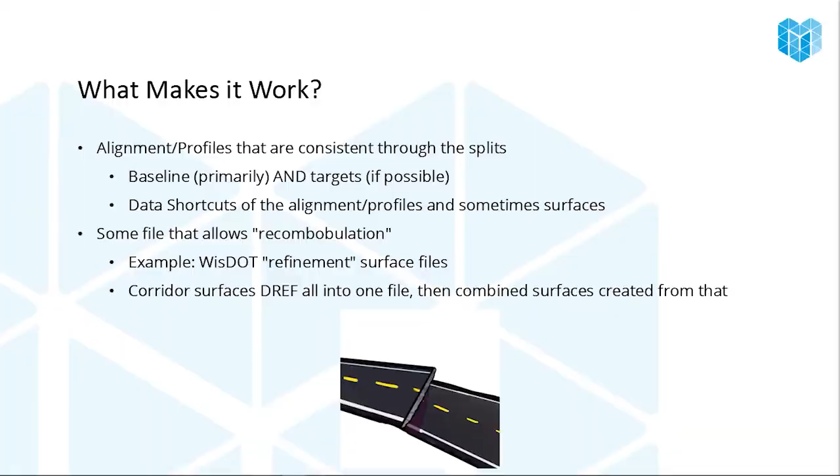So with those things in mind, where do we best split a project? I tend to say generally here, but really what we're going to do is find where the project has the minimal amount of change. Now, if you've got intersections in a project, those are the most complex areas, or generally the most complex areas in a project. You might have other complex areas too. You want to avoid complex areas or places where there's a lot of change, because things don't always line up great in an area of lots of change. You want an area that's more consistent—a very boring part of the road in between two intersections is a great place to do that.

Also, I would avoid any areas that have grading, because grading is usually not consistent. It's coming off at what could be different angles and could be not as prime for the kind of split that we need. Like I said, we want to divide this in a clean area. Now, I have seen projects where grading was a predominant part of the design, and it would be very difficult to split anywhere else—find the best place in the grading if you have to do it there. Try to make it perpendicular; try to find a place that would be perpendicular and a little bit more consistent for the two areas to be matched up.

I'm also going to recommend that you avoid sample line stations—not because it's an actual problem, but if you're going to have any trouble at all with this, it will be where the two points join. You don't want that to be at a sample line station, where it's going to report weird information onto your cross sections.

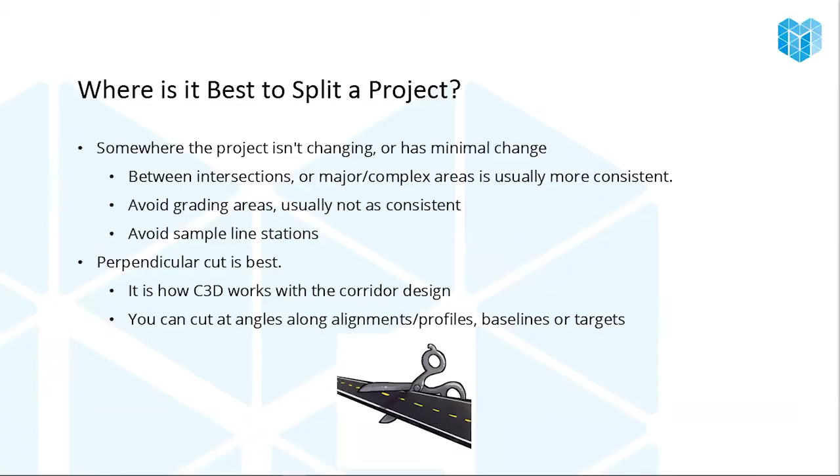So the last thing I want to talk about here before we get into a demonstration is confirming that the splitting and rejoining is working. I am going to touch on the rejoin process here. Really what we're going to do is confirm it. Whether you use this combined surface as a deliverable or as part of your deliverable or not, you may want to create that side file so you can create the combined surface and paste it together just to double check things, even if it's not going anywhere else. So create a file where you can create a combined surface and paste those two surfaces or multiple surfaces together. I have two in my presentation here.

And turn the contours on, because nothing shows abnormality like a contour. If there is any deviation at all in horizontal or in vertical in profile targeting, contours are going to show that immediately. And I think you may even be surprised. I'm always surprised when the contours are so smooth in an area where I know there's a seam. So it's something that you can check very easily.

You can also use profile views to do this, and it might be a good idea if you have a lot of elevation design going on. Create a profile view of the surface and the area that you're doing the work in and check. I think this is a little harder to tell because the differences could be slight where the contours would show, but in the profile view it might be so small that you wouldn't necessarily see it. I'm talking inches rather than feet. But if it is off by feet, you would see an escarpment and know that there's a problem there. Basically, where the corridor surfaces or project surfaces are stitched together, there's no seam visible to anyone showing how you put them together.

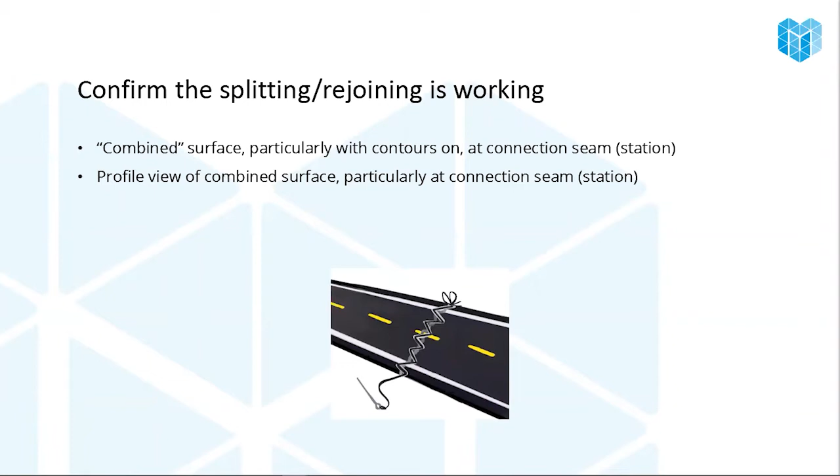Now, do you even need to rejoin the surfaces? I'm going to recommend on some level, yes, but maybe not for your deliverables. If you're working on a project where cross-section sheets are your deliverable and you're not going to split your project at a sample line location, then maybe the cross-section sheets are enough. And as long as those are good, it doesn't matter if you're off by a couple of inches up, down, or sideways at the join point. Also, plan and profile sheets can sometimes get away with a little bit being off at a seam point, but you couldn't be off by much.

But if your deliverables are things that are fine not knowing if the rejoin worked, then maybe you skip that. I'm going to recommend it again, just as a back end check to make sure things are correct. One of the things I've noticed about Civil 3D specifically is that we can no longer just explode and draft over something to make it right. We really do need to concentrate on making the project correct and almost digitally developing something like we will in the field.

Not in every nook and cranny perhaps, but generally if you want something right, you need to go in and do a little extra work to make sure that it is clean and correct, and exploding and drafting over is just not going to do that.

So now let's swing over and take a look at our presentation, or the demonstration, I should say. I do want to point out that I'm using Civil 3D 2022. However, everything that I'm doing in this file will work in previous versions. In fact, I don't think there's anything that I'm going to show here that you couldn't do in 2016, 2018, 2021, all the different versions here.

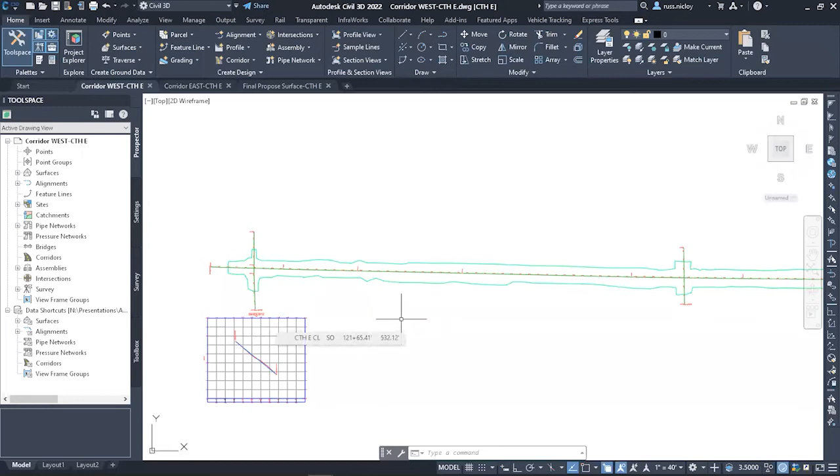So what I've got is a project between two intersections. And as I said, it is a fairly short project. I might even try to accomplish this in one file and not split it. I do have the surface existing conditions, all the alignments and all the existing profiles in their own files, and they are data shortcutted into the file. So I've already practiced what I'm preaching here of splitting the file up that way.

I do want to call something out real quick, and this is something I did learn from WisDOT, but I think works for everybody. The existing ground profile is here. It is data referenced in from my alignment profile file, but this profile here is actually in this file. I'm designing it here where my intersection is. My plan is I'm going to use the intersection tool here, and that will mean that that proposed alignment will react to the intersection tool. But to have that reaction, you need to have it in the file.

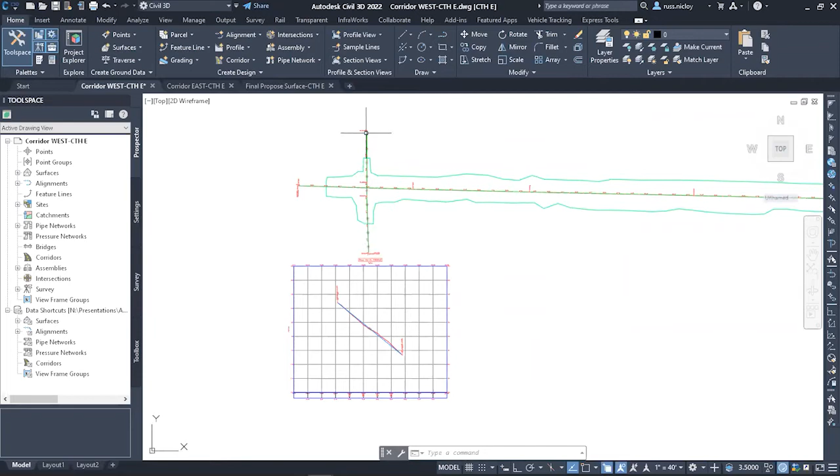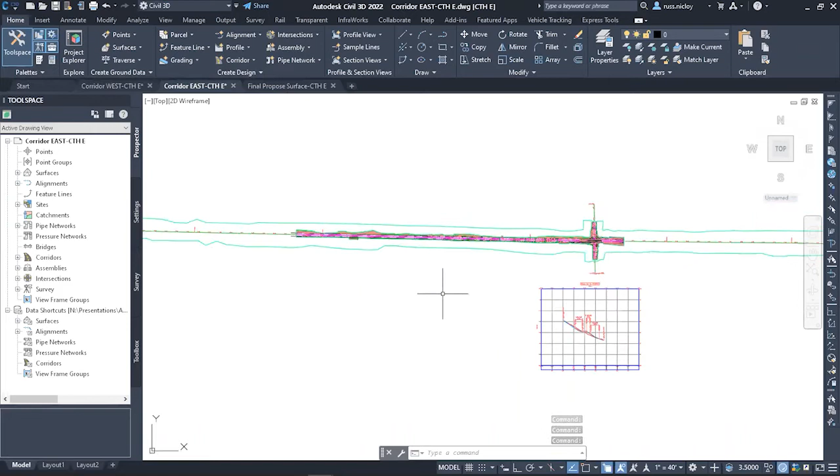So I do my profile design work on my side roads in the file with the corridor, the intersection. The mainline profile here is in my alignment profile file and is data shortcutted in here, as well as in my east version. You can see here, I've already started creating my corridor. I have started the east side of this. Through discussions, we've discussed that the project should split here.

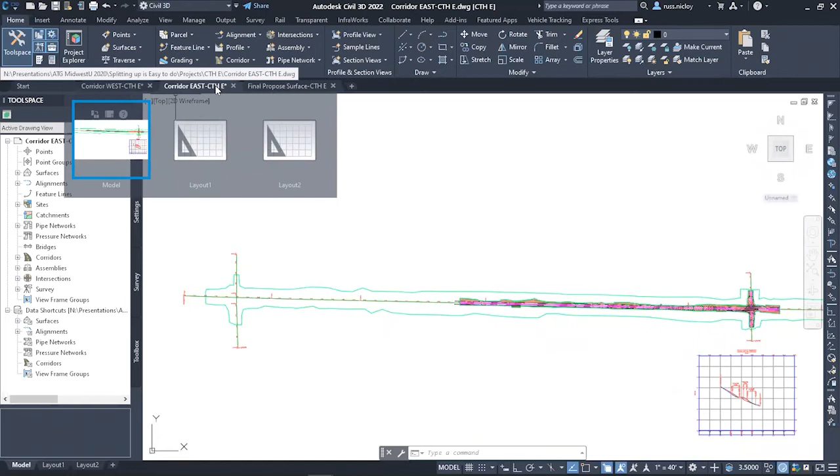Let me zoom in so you can see where that is. It's at station 126+00. Like I said, probably where a sample line will end up. I should have split it at 126.13 perhaps. But that is where this project is going to stop. So the east side of County Highway E has the corridor and intersection up to that point, up to 126. I'm going to go back to the west side here and develop the intersection and the design up to that station and stop exactly at station 126.

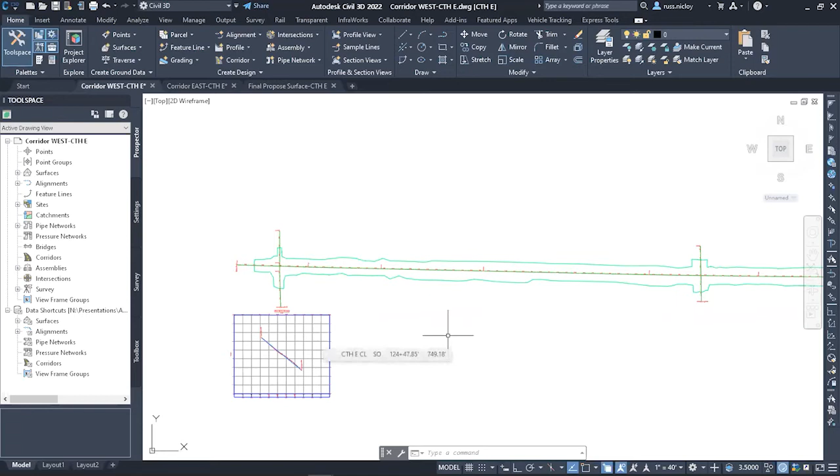Stopping at a very granular, very precise station is, I'm going to say, mission critical to what we're doing today. You might be able to get away with it, but I've never tried to get away with it. So I'm going to come up and choose the intersection tool. I'll create intersection here. I'll do this quickly, but I wanted to show the process. This is my County Highway E and River Road intersection, just so that I know what that intersection is when I find it later.

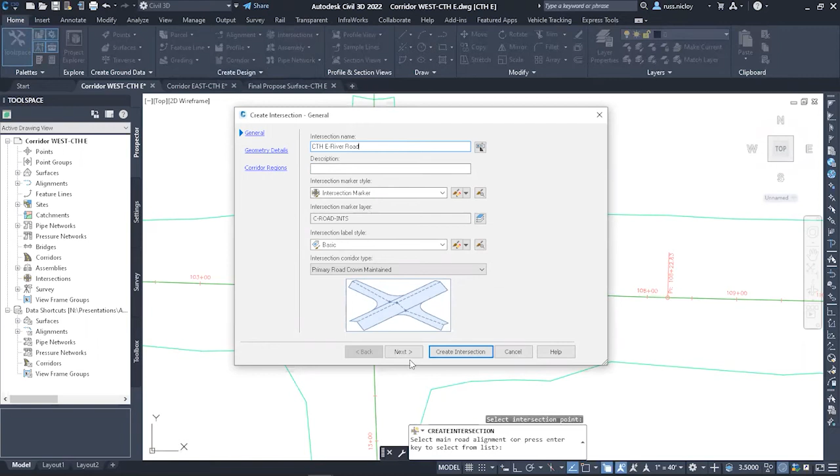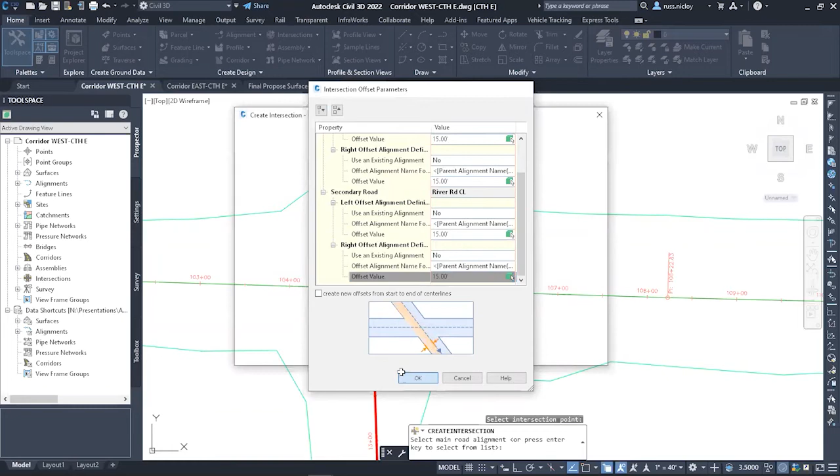I'll go next, and in here, I just want to make sure that the profiles are both there because we are building a three-dimensional corridor here with the intersection tool. I'll go to the offset parameters, and my defaults are not set to the width of my project, so I am going to set those. These are all 15-foot roadways here. The curb return parameters, I'm not going to change. I just want to touch on it: part of what makes this so complicated is the turn lanes, whether you're expanding the lanes and that type of thing. So I'm going to say okay and just accept the defaults for today.

I am also going to look at the lane slopes. Those all look good. And I'm going to confirm the curb return is giving me 25 extra feet on the profiles so that the corridor, when it's built, doesn't miss any stations by a very, very short amount. 25 feet is plenty to cover our design there.

When I go to the next tab here, it gives me the opportunity to create a corridor. Now notice there are no corridors in my west file. The corridor I showed earlier is in the east file, so it's not in here. They are completely separate, completely new. You can add this intersection to an already existing corridor if you wanted to, but I'm doing a fresh corridor in this file using my existing ground as my target, and these are the assemblies I'm using.

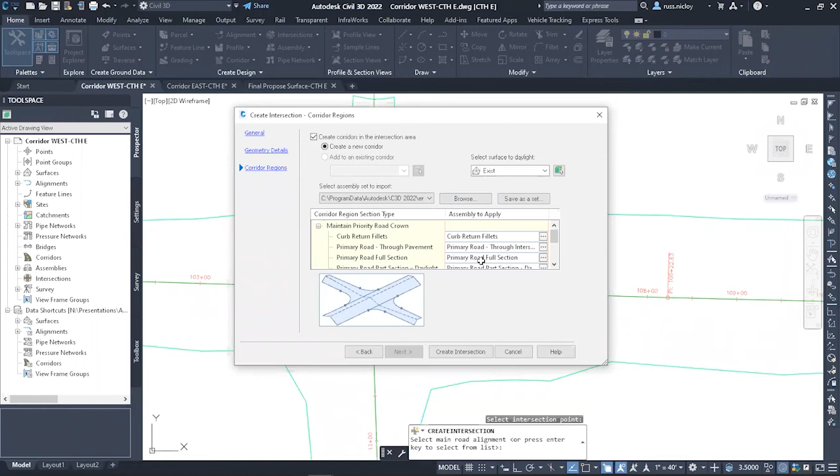I'm basically using the default assemblies to build this corridor. I'll say create intersection, and that will kind of grind away for a little bit. And there is that corridor. Now, the corridor is actually more than meets the eye here.

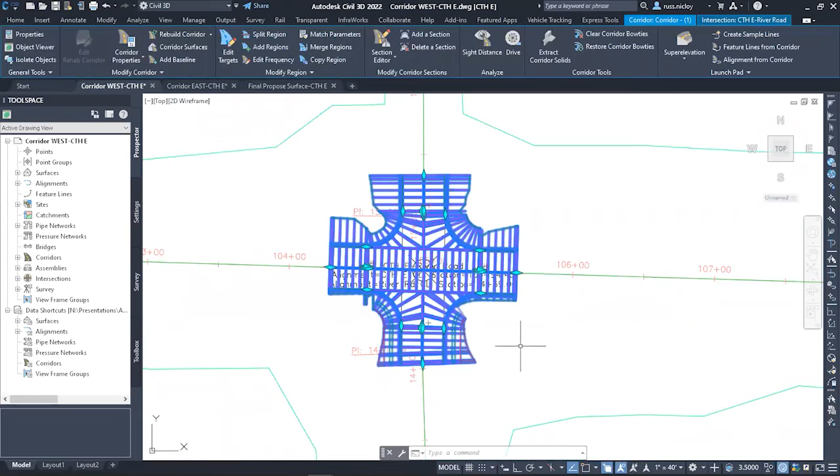If I come down here and select on this, one of the best practices I think that should be shared with everyone is when you're building anything that has intersections, build the intersection or the more complicated design first. And then the rest of the design is easy. In fact, I'm just going to drag my corridor out here away from my intersection, so that I can see that the design that I ended up with at the end of my intersection is just going to continue on.

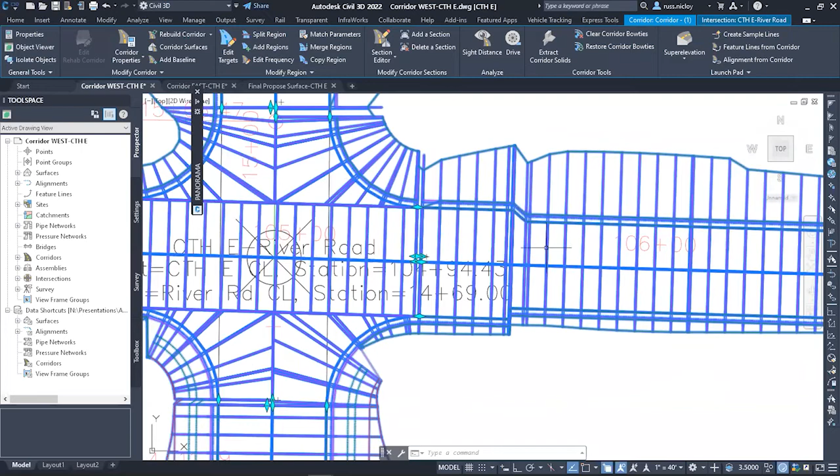The downside is because I told the lanes to be 15 feet, they're targeting 15-foot wide alignments here. When I move past that intersection, the targeting stops here, and you can see I've dropped down to 12 feet. My assembly had 12-foot lanes involved in it. So I'm going to hit escape, and then I'll select the alignments that are targeting on the outside edges there. I'm selecting both of them, grabbing the diamond grip point because they both will move together. You can see that they're moving together there.

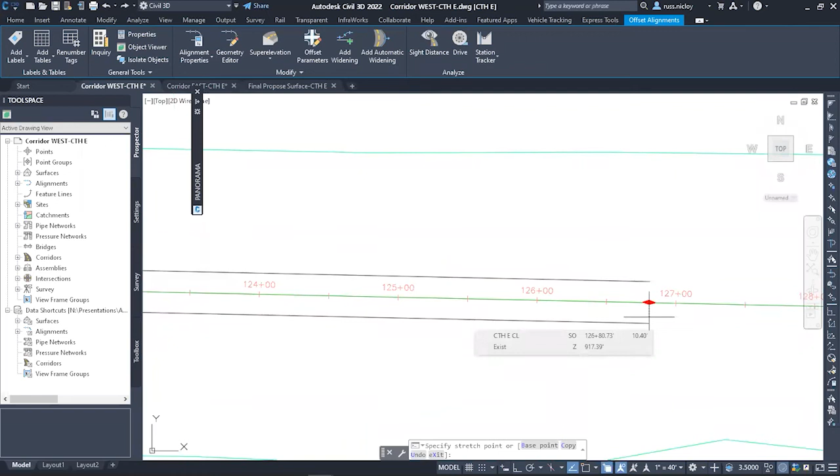Now I'm going to move these down to make sure that I'm past 126. In fact, I'm not going to go to station 126. I'm going to go well past it. This is one of those cases where going further, way further, is better than going any amount shorter or directly to it. The corridor will end where it ends, but the targets I want to be a little bit further there. Now I'm going to come back here, and you saw me drag this out earlier.

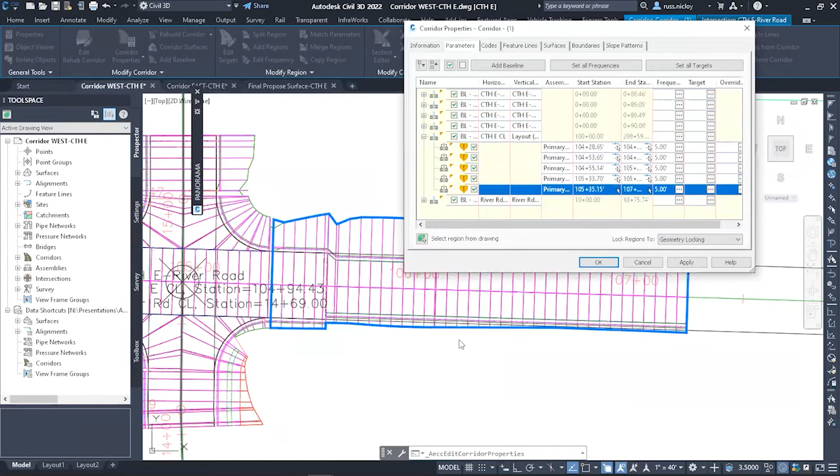I'm actually going to go into the corridor properties. And in here, I'm going to minimize all these so I can see which alignment baseline I'm on. I'll expand that baseline. Notice it's highlighting in the screen. That's what I'm looking at. The regions here, if you click on the regions, they highlight. And I want that last region, the region that includes the end of it here. So I'm just confirming that.

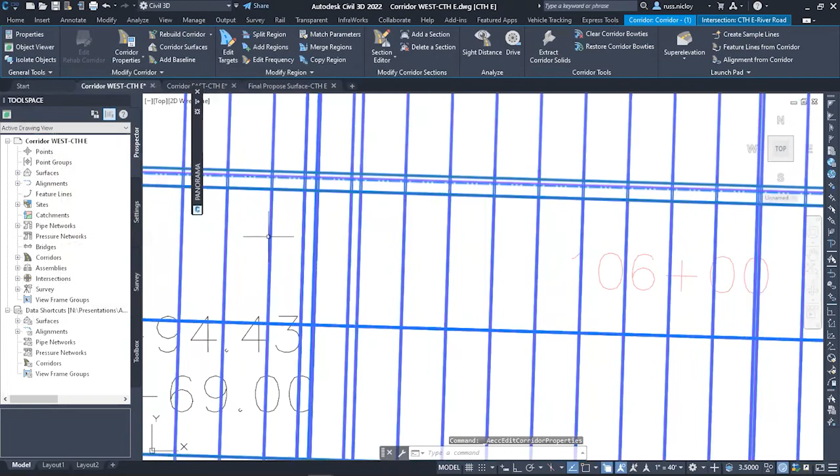And I'm going to tell the end station of that region to be 12600. 12600. I'm going to click OK so I can rebuild that corridor. And you'll see here that lane is now, there's no longer a 15 to 12 foot jog anymore. It's going all the way down to 126 over here.

Now, I am actually going to go back into the corridor here. I'll select the corridor. I'm going to go to the corridor surfaces, although this will be in the corridor properties as well. The surfaces tab, I'm going to build my top corridor surface. So this is County Highway E West. I want to call out that this is the west surface top. And I'm going to change the overhang correction. I'm going to use links and the top code to paste that in.

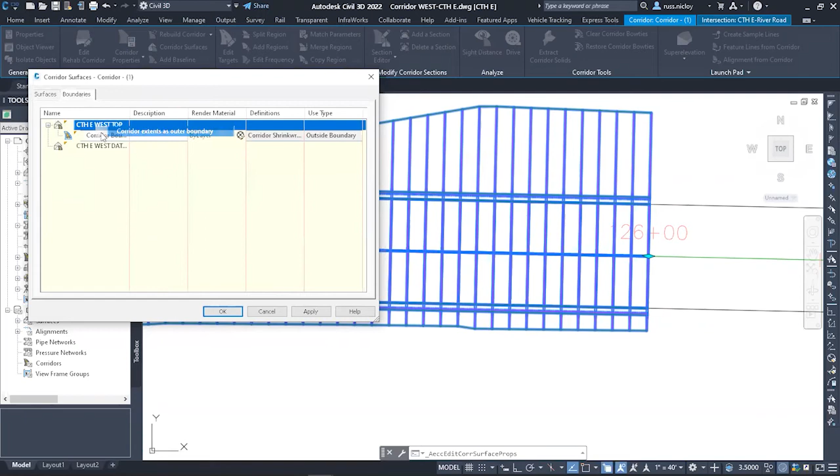Then I'm going to click on the surface again and create the County Highway E West datum surface. And come back with the links and add those datum codes in there. I'm going to turn on the add break lines for the intersection. That'll clean up the intersection surface area. And I am also going to add in boundaries here, just using the corridor extents outer boundary. It's the easiest way to do that. And it is quite dynamic later on when we're revising our corridor, I should say.

So there is our corridor and our surface. Top surface in particular, the datum surface is here as well. I'm going to click save on that. And then, not only did I have the west and the east, actually I need to stay in the west here for a second. I'm going to come down here. I need to save the file for the data shortcuts. I am going to make the data shortcuts in here. Great thing about data shortcuts is they keep things up to date, so you can create them very early in your project and not worry about the revisions not keeping up to date.

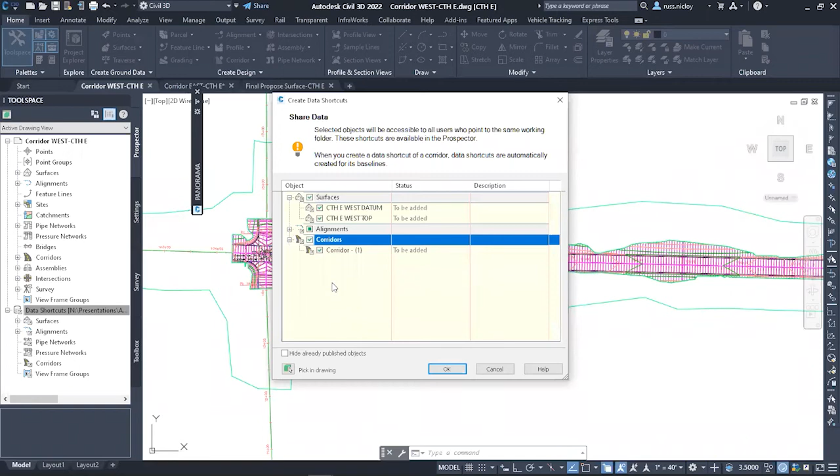So I'm going to bring in both of those surfaces. I probably should bring alignments, but I'm not going to today. I am going to bring in the corridors in case I want to use those a little bit later. Like I said, cross-section sheets in particular, it's a great thing to use. So I'll say okay to that. You know, those are available.

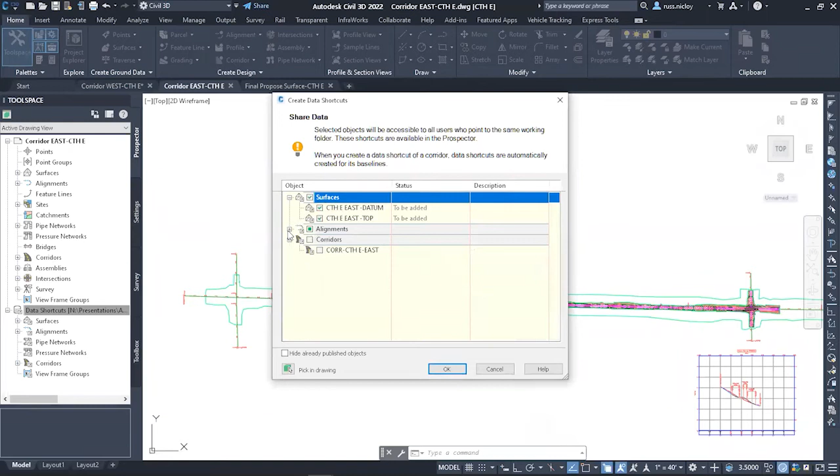I'm going to switch over to my County Highway E East or Corridor East file and hit save and create the data shortcuts for that as well. And I've already built those surfaces here. I just didn't create the data shortcuts. And again, I am going to bring in the East corridor here as well.

Now with that, I'm going to go over to the final proposed surface and do that combination file, or recombobulation file. There's nothing in this file currently. I have built the surface that will be my combined surface. I called it united top surface, but there's nothing in it. There's no definition there yet.

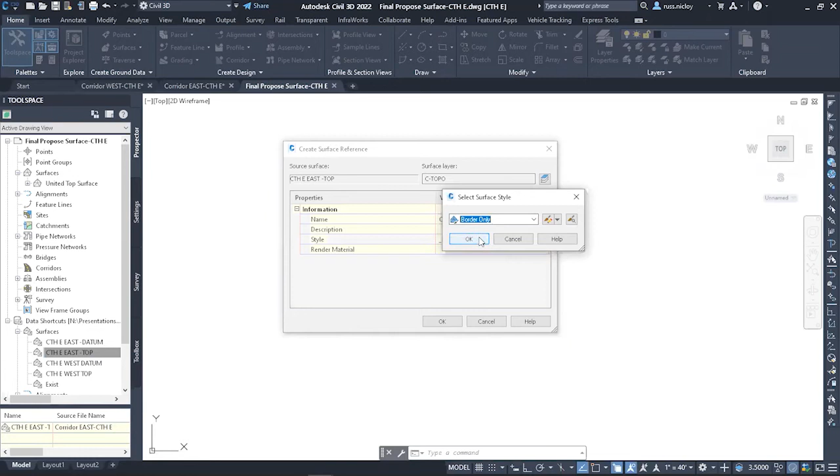I'm going to come down here to data shortcuts. I'll expand surfaces, and I'm going to bring in the east top. Right click on that, create reference. And generally when I do this in a combination file, I bring it in as no display. Now I'm actually going to go in and change that. I am going to bring that in as border only, just so that you can see what is in the file before we rejoin them together.

I'll say okay to that, and then I'm going to zoom extents so I get back to the project. So here's that east corridor. Here's station 126. I'm going to zoom in on that area there. I'm going to come down here to the west top and create reference. And again, border only, I'll say okay to that.

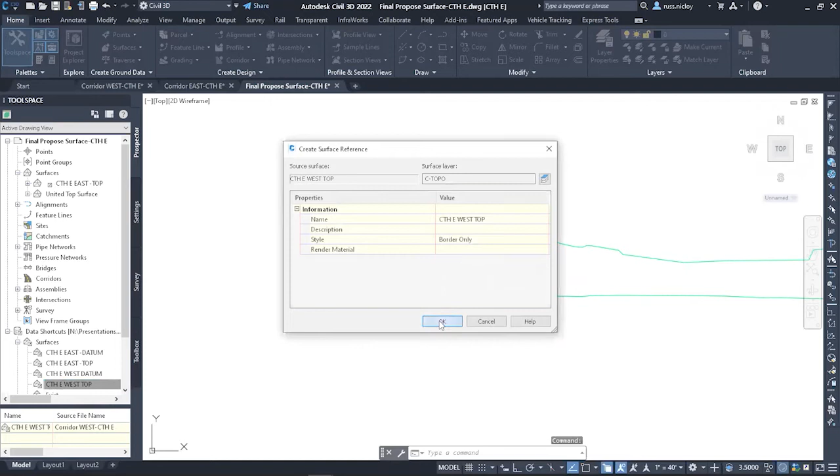I'm not going to bring in the datum surfaces. I would do that in their own rejoin file or combination file. But here you can see they butt right up against each other there. There is a seam between those two.

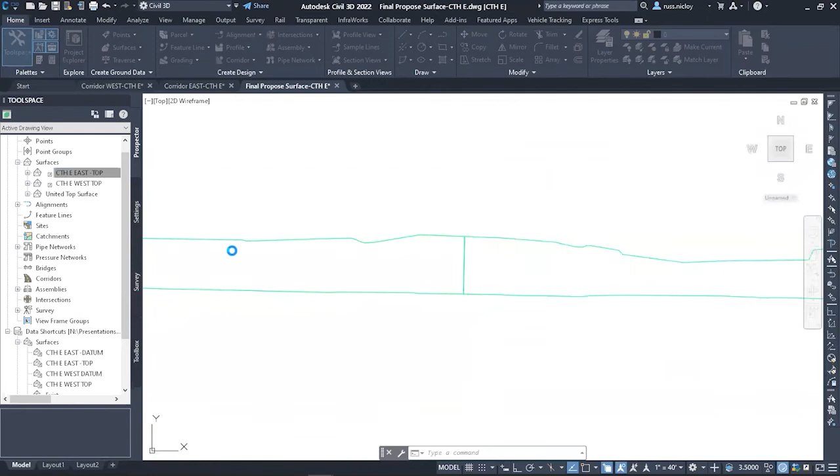Now, this is literally what I do when I rejoin them. I make sure that those two surfaces don't have any style. Like I said, generally no display. That way, when I paste these surfaces into the combination file, I am looking at only the combination file. I'm not having to decipher which surface I'm looking at.

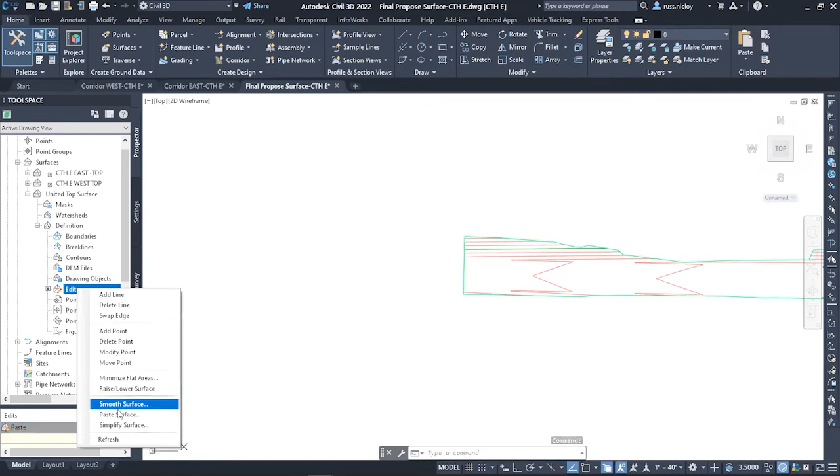I'm going to come under the definition here, right click on edits and paste surface. I'm going to paste in the east top. Normally pasting surface order is incredibly important. In this case, because they're not overlapping, in fact, they're coming in and meeting exactly, it doesn't matter which one we start with. I'm going to start with the east one. In this case, there is that surface, and I'll paste in the west there.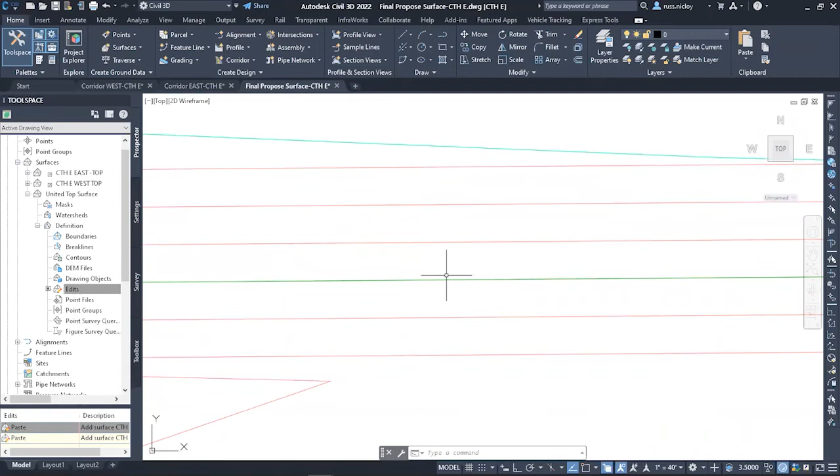And this is the part that still blows my mind. Even though they are in two different files, two different designs, because the alignment and profile are the unifying factor here, there is no way that you can tell where station 126 is without an alignment. And if you zoom in there, you will see any kind of little hiccup very, very easily. So I'm looking at this and like, yeah, this has worked. I can now move on.

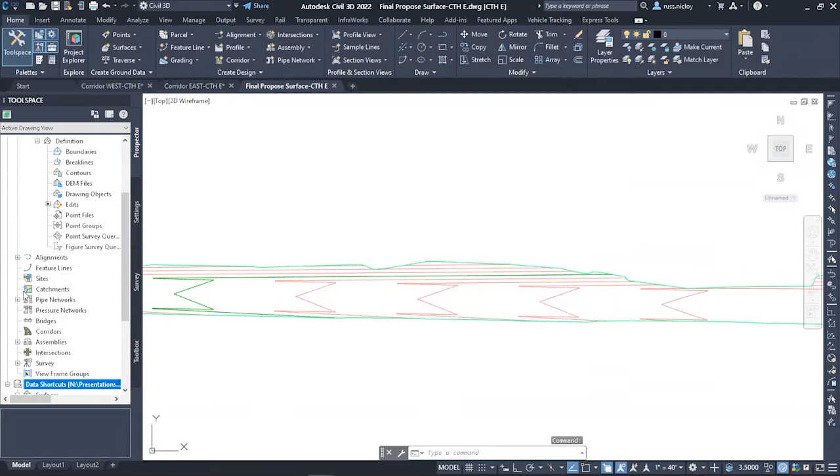I am going to hit save on this file, and I am going to create a data shortcut for this in case I need to send it to cross-section files or volume calculation files, or using that surface for anything else that is now available to us.

So with that, let me sneak back here to my slide deck. And let's take a look at how we make sure that the project stays up to date through revisions. This is important because revisions never end. Every project as it's going out the door is being revised, or at least that's been my experience. So the revision process is incredibly important for the design areas as well as for the deliverables that you're going to have. You need all of them to be correct.

So we want to maintain a single source of truth here throughout the project. So the objects are all defined once and then referenced in multiple locations. That way, if there's any change to that one definition, it updates all of those references wherever they may be. This calls on good data shortcut management.

And you may have to fight the urge, but do not make copies of an object in another file. No promoting of data references, because that breaks the connection back to its definition. It will make the object there. It's basically making a copy of it. But if the definition is updated in its file, it does not update a promoted data shortcut.

By the way, there are times when you're handing the project in and it's required that you have to promote. Obviously, in those situations, the project is done and you're handing it off within a matter of minutes or hours. You can promote then. I don't want to say that it's an absolute, but during the course of the project, as the project is being developed, you should not be promoting in cross-section files or in plan and profile files, that type of thing.

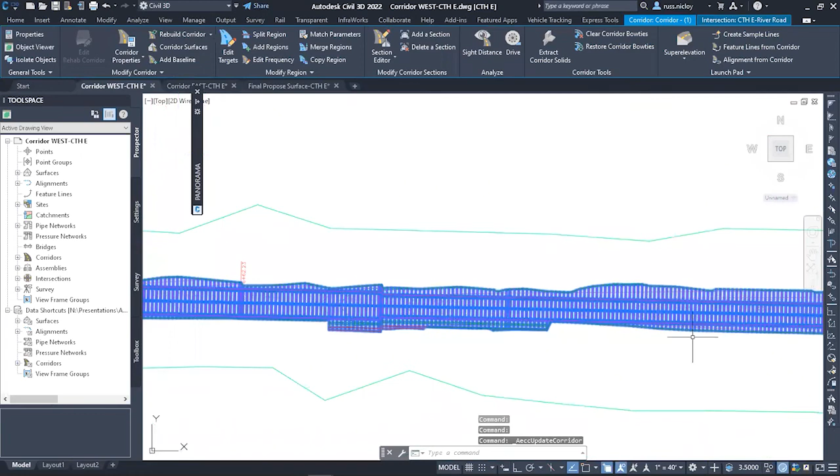And then I'm going to select on the corridor and rebuild it. That will update the surfaces, both the top and the datum there. Notice the corridor continues on, but we now have that 15-foot to 12-foot transition, very sharp transition there. I am going to hit save because that will push the data reference of the alignments back into my combination file. I'm going to repeat similar steps here in the East file, pulling the target alignments back.

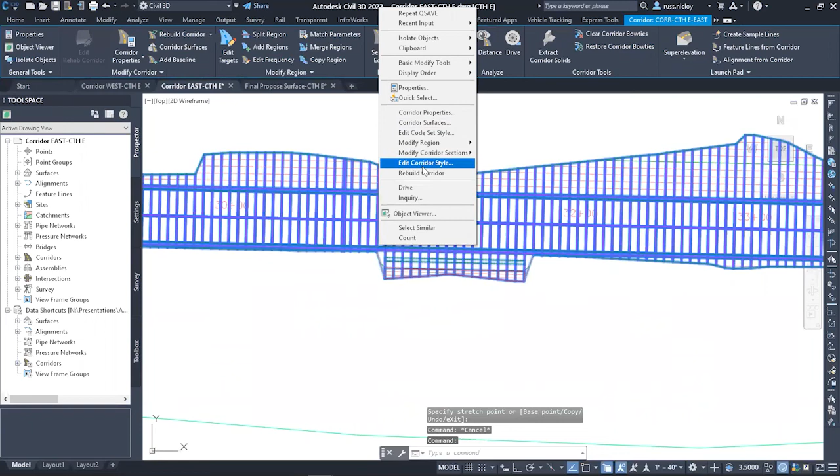And I saw another ditch over here, so that's going to be a great place to do that. I will select on this. I'm going to right click and rebuild that corridor. And again, I am going to save it after it's done. And you can see quite stark there. I'm going to hit save, so that pushes that data over to our combination file.

And now, as I said, if the combination file was closed, it would automatically synchronize. We should be seeing a big balloon here that's asking me to synchronize. Somehow I turned my synchronize off and I forgot to turn it back on, but the button is still down here. Or you could come up to the Manage tab of the ribbon and use Synchronize References here.

A little bit easier to see in a webinar, so I'll use that one. Now, as that happens here, watch this spot right here. Oh, and literally I did it again. Watch the spot right here.

Oh, wait, I haven't rebuilt the surface. You're not going to see anything. So we're still seeing the old ditch line in that area.

If I expand over the surfaces, the data shortcuts were done, but this surface here has those surfaces pasted into it. So it says, wait a second, my definition has changed. Do you want me to rebuild? I'm going to right click and rebuild.

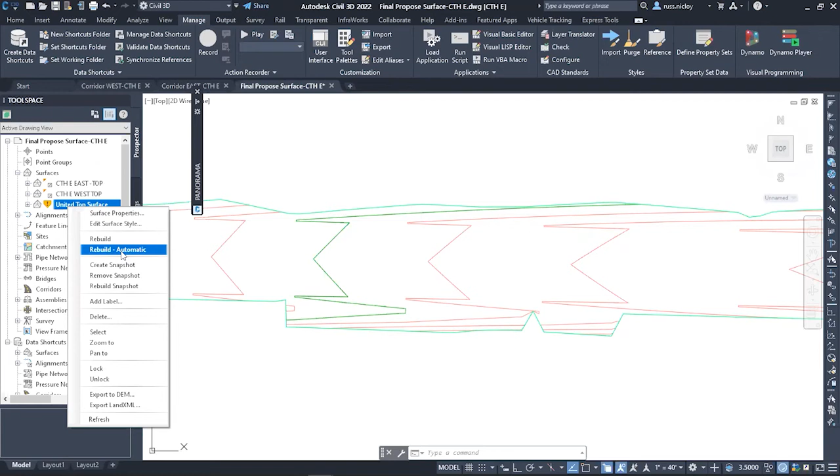Rebuild. Now, there is this rebuild automatic. For this file, for the combination file, I think I do recommend the rebuild automatic. It's worth the time and effort. I do kind of stay away from rebuild automatic for surfaces and corridors, just because if you're making nickel and dime changes, they can take a long time, and it kind of adds to the time when it's automatically doing it between every little change that you're making.

So I am going to just manually re-update this or rebuild this, and you can see that change has now taken place here. Again, except for the contour lines where we're going from 15 to 12 feet, you can't tell that there was any, I think it's in this neighborhood in here, you can't tell that there's any seam through here or any division that went on there.

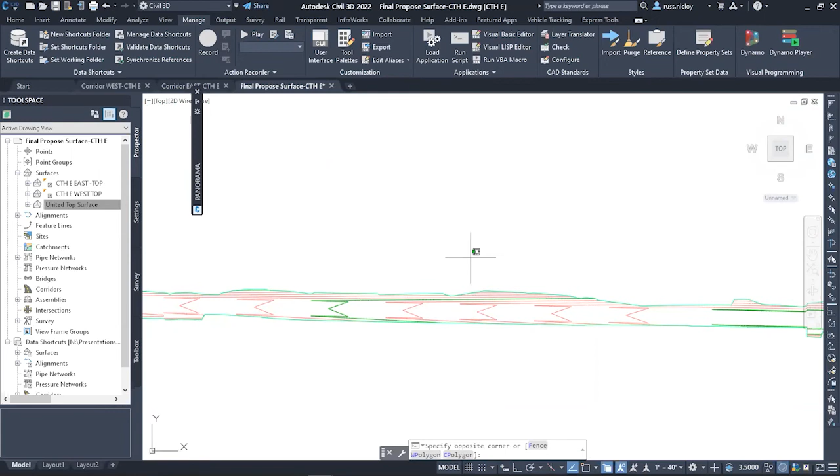So with that, and true to form, I've already created the data shortcut for it, so I'm going to click save there. I am actually going to create another file real quick here. And I'm going to go to the data shortcuts and bring in the corridors.

Like I said, this is for maybe your cross-section file or for some other need, but I'm going to right click on corridor. That's my east one. I'll create a reference of that. When you create a data shortcut reference of a corridor, it brings in all the alignments and profiles for you, so I didn't need to do those individually, but it will bring those in.

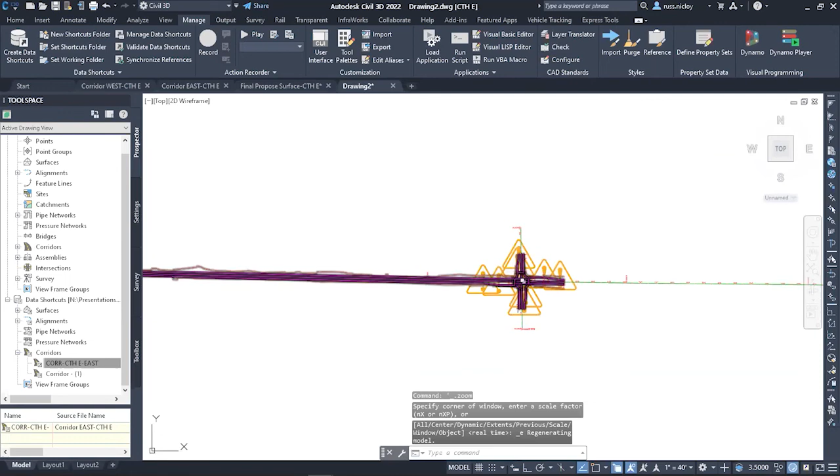Once it's done bringing that in, I'm going to zoom extend so you can see that there - style issue there, but otherwise we've got a corridor here. I've got the corridor style set so that we don't have the frequency lines showing up, but you might turn those back on. This is a corridor in all respects, except you can't edit it.

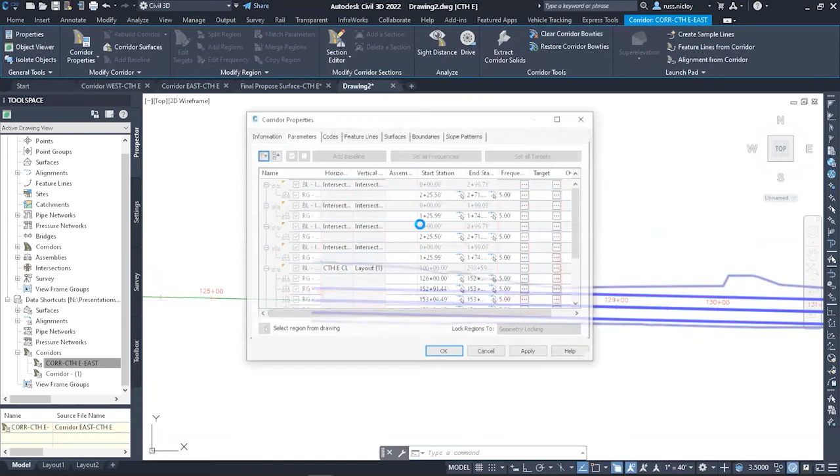If I select the corridor, there is no grip point here, but I can go into the code set style or into the corridor properties, into the codes here, and tweak codes or feature line styles here.

I'm going to bring in the west one. Now, I forgot to change the name as I brought in the west one, so it just says corridor 1. But you will see here that as those get put together - by the way, if this is a cross-section file, we do have the baseline alignment here that was brought in with the corridors. Here's corridor west, here's corridor east, and you can see that line in between them.

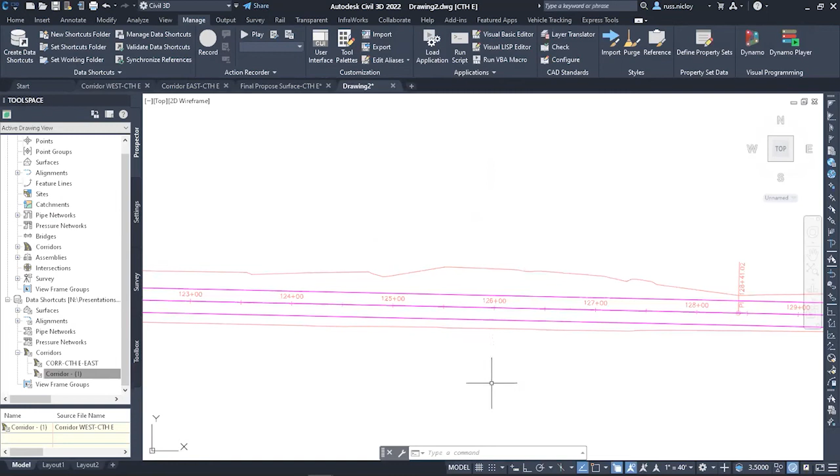But you can create those sample lines off of the alignment that's in here. It's a data shortcut alignment, just like any that you would create in here. But now that project is also here as corridors being joined together.